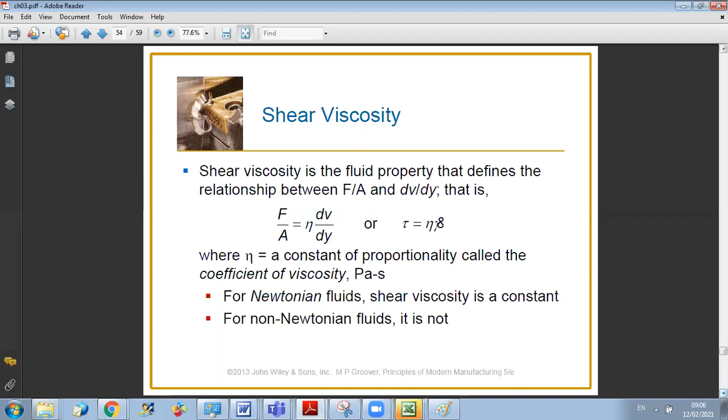Now we will introduce several possible behaviors of fluids. You will see fluids having constant viscosity. Of course, when we say constant viscosity, is it for a certain temperature? Because viscosity will always vary with temperature.

Imagine that you have a solid and you heat it. As you heat it, it will go from solid to liquid. So it will go from infinite viscosity when it is at the solid state to reduced viscosity when it becomes a fluid. But if we do the analysis at constant temperature, then the viscosity can change with the shear rate or can be constant.

So in case, for a certain temperature, the viscosity is constant with the shear rate, this is called the behavior of a Newtonian fluid.

Now, what other behaviors can we face? We have the ideal Bingham plastic, which is, if you want, not defined as a solid and not defined as a fluid, because it can behave as a solid for certain stresses below a certain yield stress, and above the yield stress it will act as a fluid.

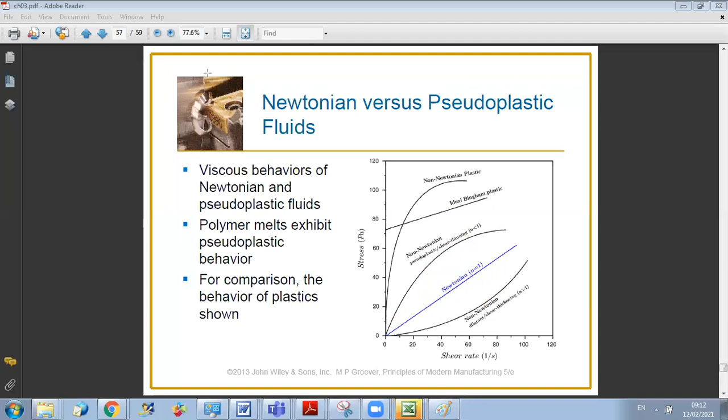So this is what we should know about the different behaviors of fluids. Now, another important behavior is the viscoelastic behavior. Viscoelasticity is a property that determines the strain that the material will experience when subjected to a combination of stress and temperature over time. Here we will take into account the time effect when we talk about viscoelasticity. So it is a combination of viscosity and elasticity.

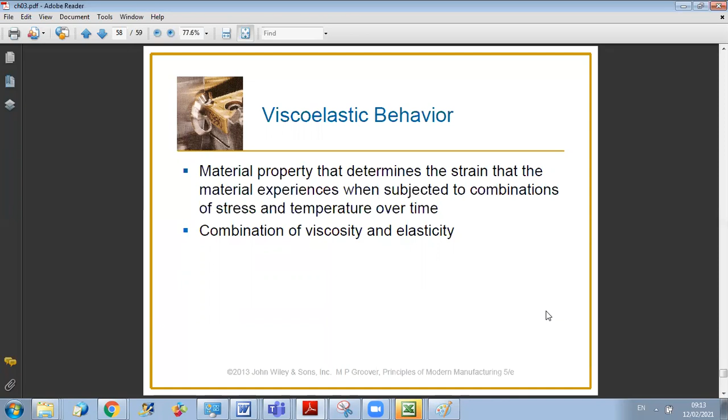So when I apply instantaneous stress, I have an instantaneous increase in strain. Then when I keep constant stress, the strain will remain constant. And finally, when I remove the stress, the strain will also instantaneously go to zero. So this is the response of an elastic material.

On the other hand, for the case of viscoelastic material, it's quite different. The first difference is that once I put a stress, I will have first a sudden elevation of strain. But if I maintain the stress constant, then the strain will increase gradually as a function of time. So the response is not instantaneous, it will take a certain time.

We are done with chapter 3. As I told you, I will post for you a formula sheet for all formulas included in the chapter. The formula sheet will also include other formulas that will be involved in the exam, but you will see that chapter 3 covers the majority of equations. So let me go over the formula sheet with you.

So this is the formula sheet you are responsible for. You should know the different relations. First, you have the definitions of engineering strain, engineering stress, and ductility measurement.

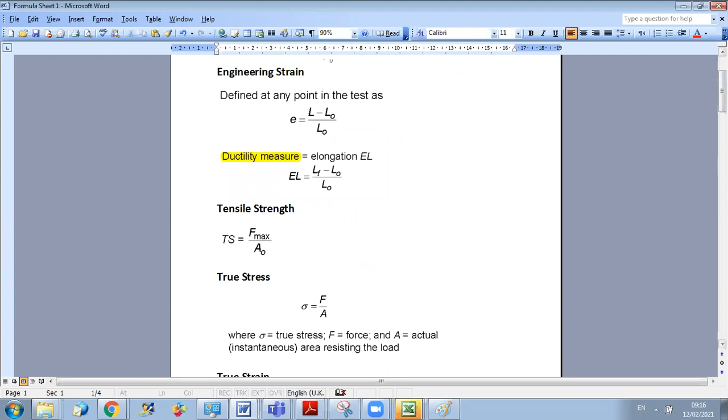How to calculate the tensile strength at the maximum force over A0. What is the definition of true stress? What is the definition of true strain? And here you have the elastic region, where sigma equals E epsilon.

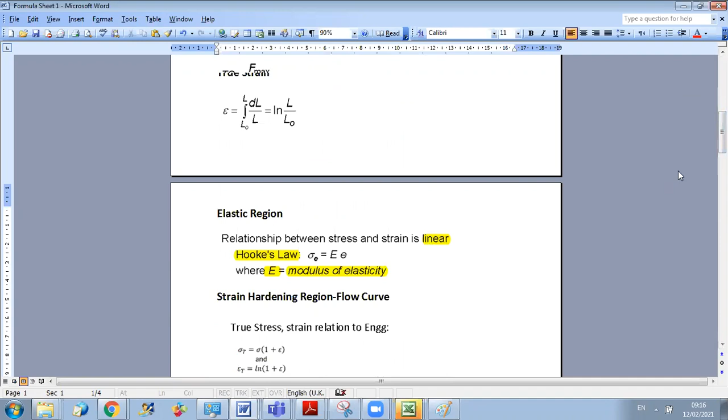Now what I want you to do is try to demonstrate these relations. You have relations between true stress and engineering stress, and also true strain and engineering strain. These are the formulas, but we will demonstrate them together in problems.

So try to think about it now during the weekend, and I will post for you also several problems that you will try to start with.

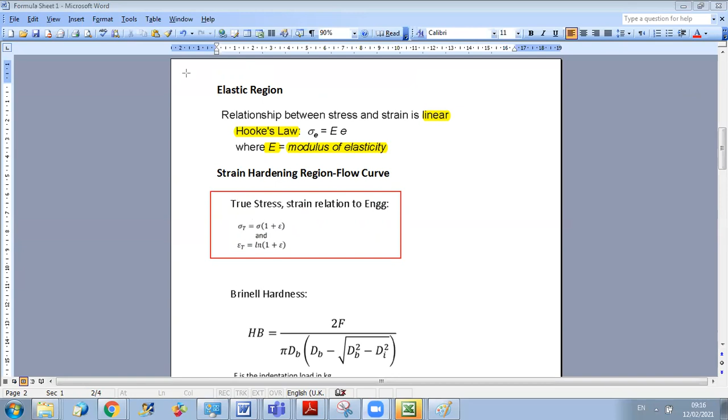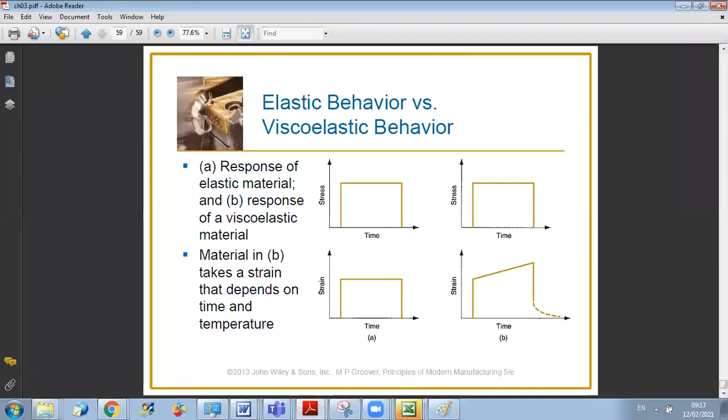Now, as I mentioned for you, for the Brinell hardness, you have a formula. If you remember yesterday, we have seen the Brinell hardness test, which consists of a sphere that I put on a specimen. Let me go back to the slide.

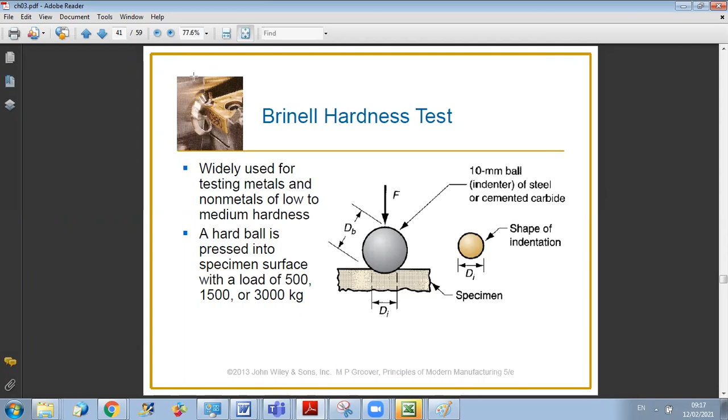So here, this is the Brinell hardness test. We have a way to calculate the hardness as a function of these parameters: the force applied on the sphere, the diameter of the ball I put on the specimen, and the shape of indentation, the resulting diameter of indentation di. So we can calculate the Brinell hardness as a function of these parameters.

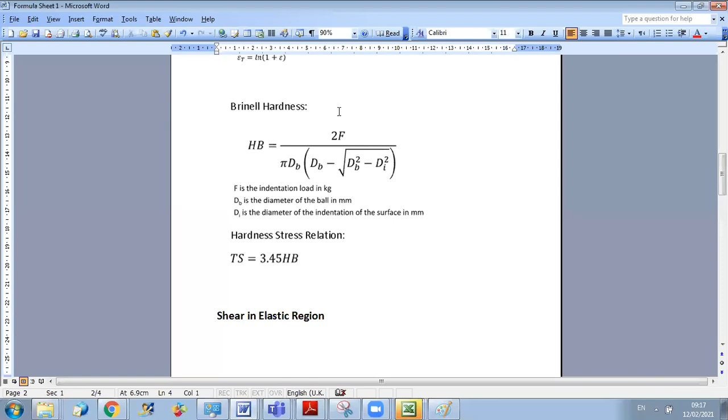Just please pay attention to units. You have particular units in this formula. The force F is not in Newton, it's in kilogram. It corresponds to the mass of the ball you are putting on the specimen. So please pay attention.

dB is the diameter of the ball, and it's in millimeter, while di is the diameter of indentation, also in millimeter. So just pay attention to units.

Also, we have developed, in general, the majority of materials that were tested in hardness were metals. And we have come up with an empirical relationship for steel that will give you the tensile strength as a function of the hardness. So this is an empirical relation that gives the tensile strength if I know the hardness.

And in this case, the tensile strength we obtain will be in megapascal. We will do applications on these formulas in the problems together. So this is in megapascal.

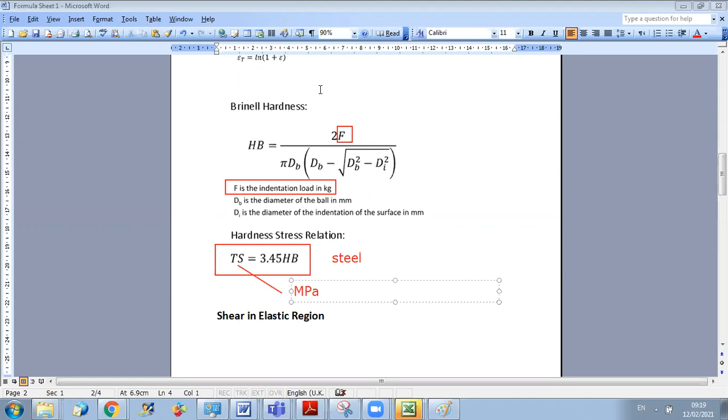Now, other formulas that are important: we have seen already together that we can relate shear properties to tensile properties. So you have the relation between shear modulus and modulus of elasticity. G is approximately 0.4 E for most materials. And also the shear strength can be estimated as a function of the tensile strength from the following relation.

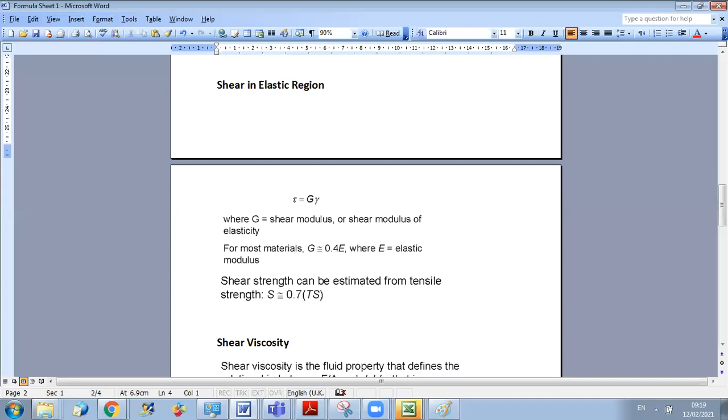Concerning shear viscosity, you have that the shear stress is the viscosity times the shear rate. So this is the formulas involved for shear viscosity. And the remaining part I

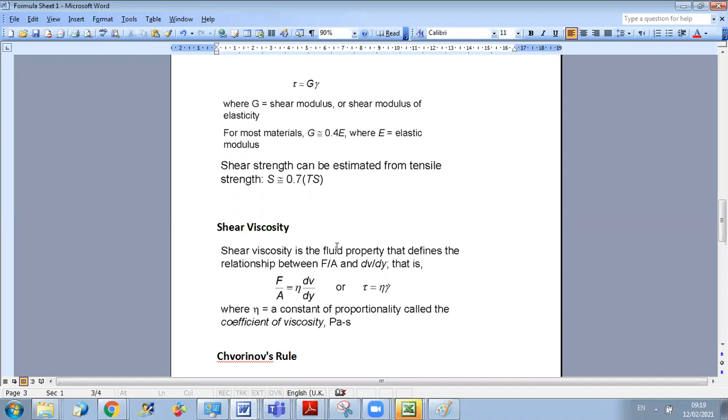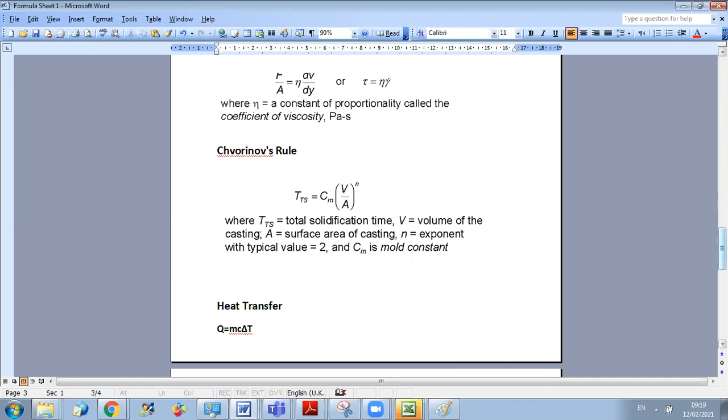will introduce for you in the next chapter. So the remaining formulas are not for chapter 3, they are for the other chapters which are included in the exam. But as you can see, the majority of formulas are in this chapter, chapter 3.

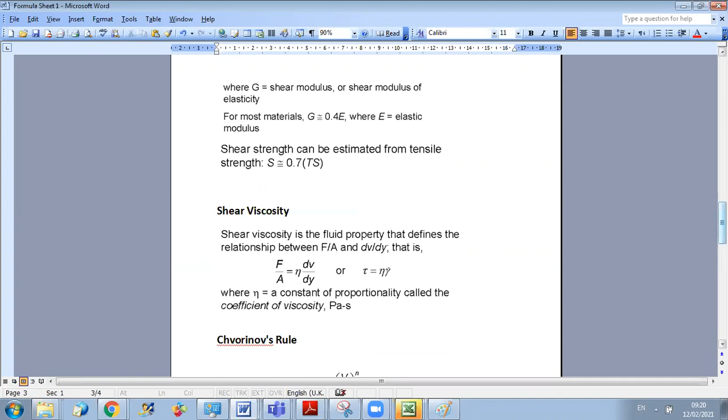So now we are done with chapter 3. I will post for you problems to start doing chapter 3, and we will correct them together after.

Now, if you want, we will start with chapter 6. And for chapter 6, I have prepared for you several YouTube links that are very interesting to see, because this chapter is more experimental, as you will see.

So I prepared several YouTube links for you. If you can try to go over them during the weekend to be familiar with the chapter. So let us, I will close this session and open a new one to start with chapter 6.